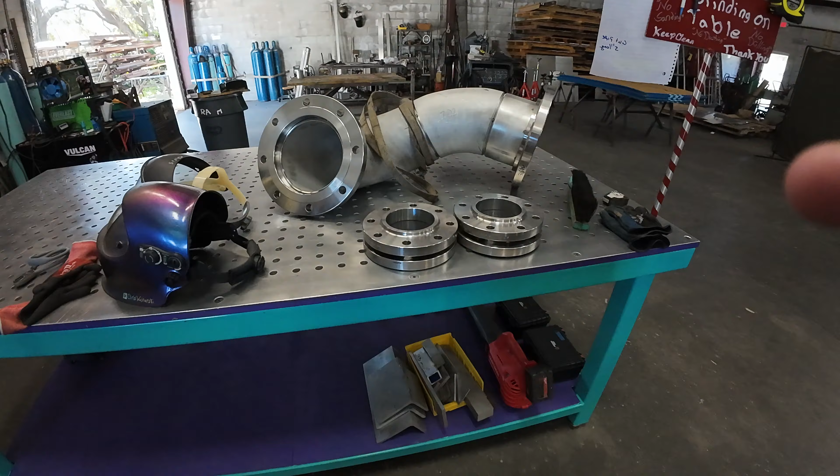Today's stainless steel pipe work, we've got to turn this stuff into pieces into something like that.

Different ways to weld and fabricate pipe to flange spool, Season 3, Episode 9.

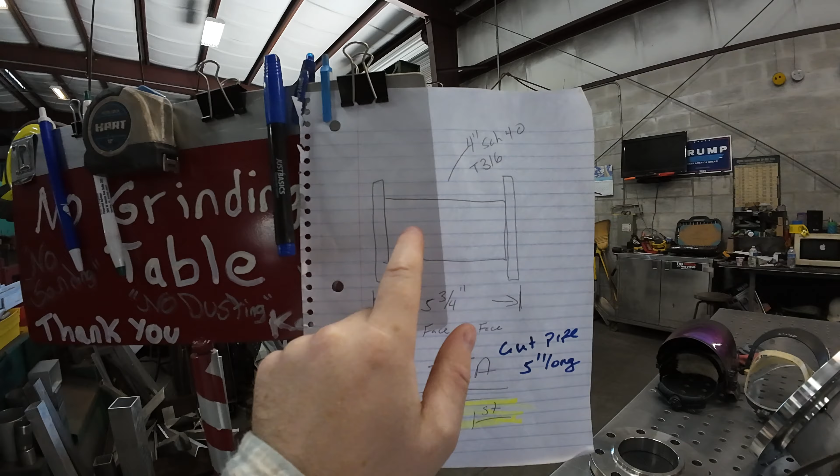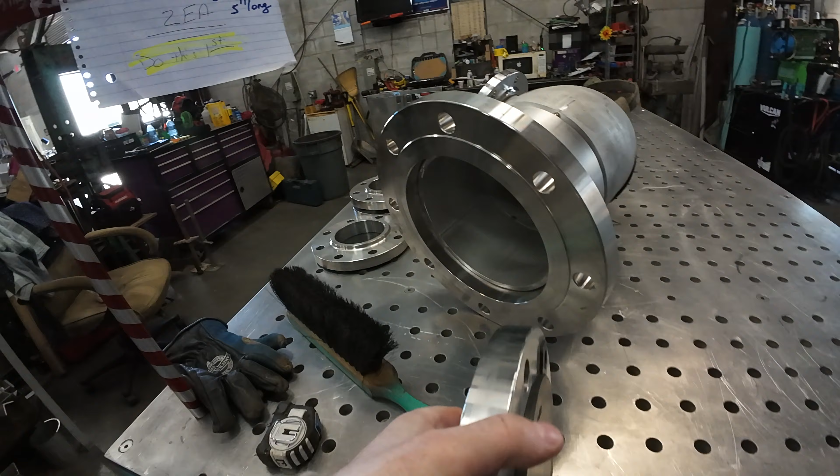Stainless steel spool, 4-inch Schedule 40 Type 316 stainless steel, raised face flanges. Got to make 2 of them that are 5 3/4 inches from outside to outside of the flange, the raised face part. So let's see how I bring you along for the journey.

February 21st, 2020. Wojnarski is back again with a welding fabrication tech tip video for everybody, and the weather forecast is 56 degrees right now, pretty sunny, tiny bit cloudy, not really, but 56 degrees, high of 63 and low of 36 in sunny Florida, Dunedin, Florida.

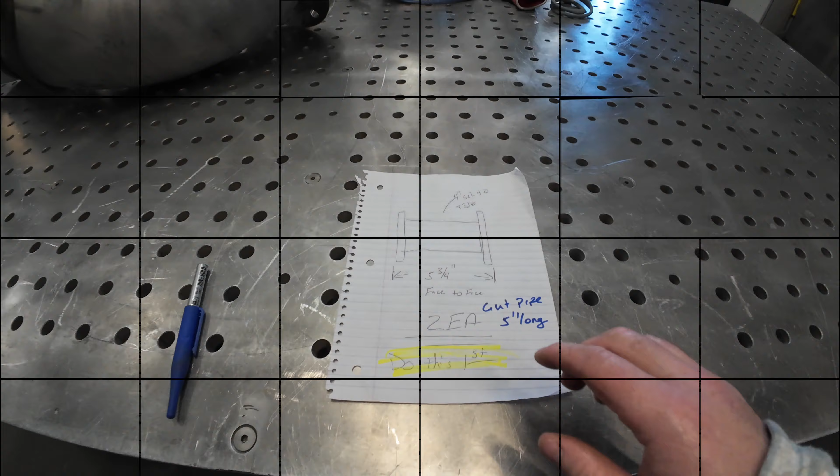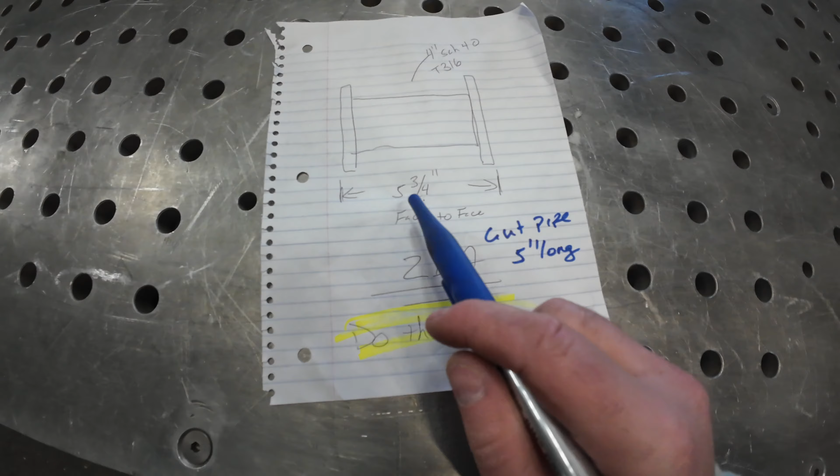So I'll explain it a little bit to you. 5 3/4, that's what I need outside to outside, and I'd like to do a 3/8 recess on the inside for the pipe and the flange. I'll show you in a second, and same thing on this side. So 3/8 plus 3/8 is 3/4. 5 3/4 minus 3/4 equals 5 inches. So I'll cut my pipe to 5 inches, and that's what I already did over there. Just got to make 2 exactly the same size, just because it's 5 3/4 face to face.

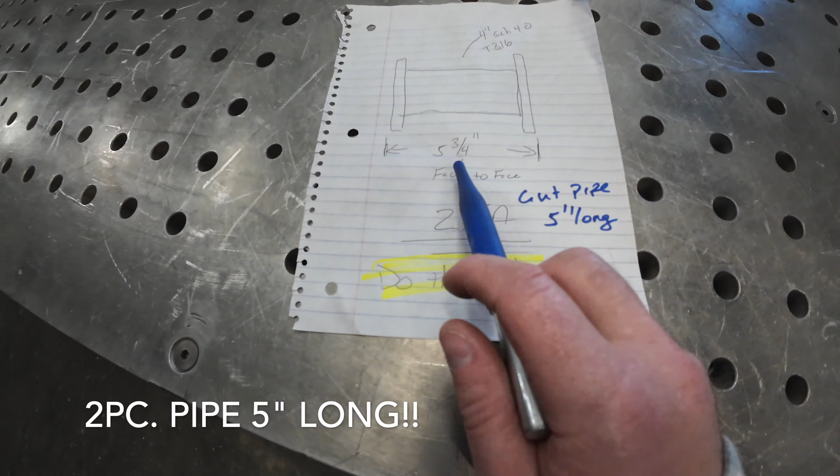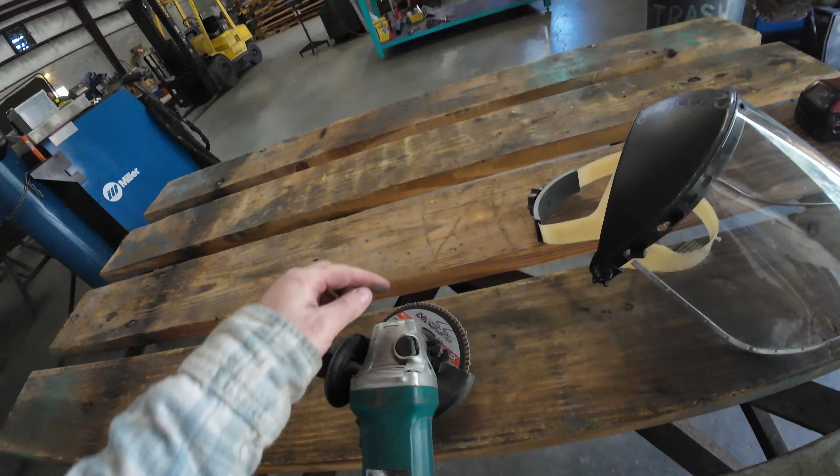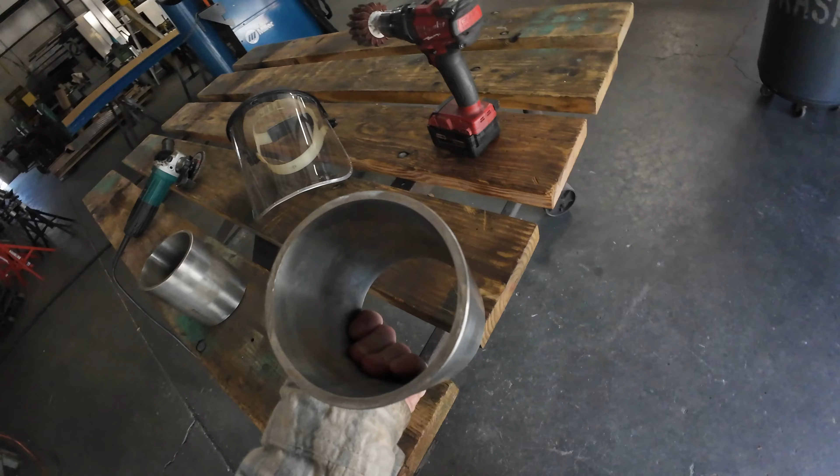So I already cut it to 5 inches, and I deburred it with the flap disc, just a regular flap disc designated for stainless steel only. That's good to mark your things. You don't want to cross contaminate and do carbon steel with that, because it could rust out your stainless. So it's good to keep your stainless stuff with stainless and designate it to that.

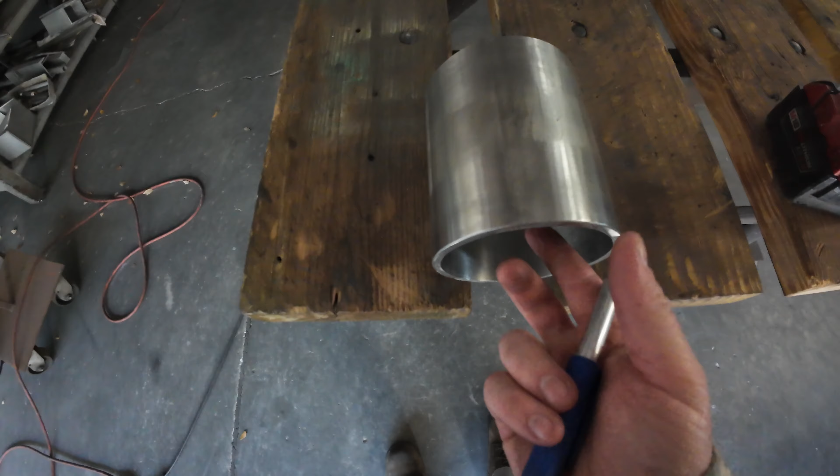After I deburred the outside, I like to take a little bit of the grinding saw marks off to weld a little better when there's not deep grooves in there. I did that with the flap disc, but I like to take a little wheel like this, put it in the drill, and just surface the outside a little bit. It makes it weld a little better and looks a little better, I think, after it's wire brushed.

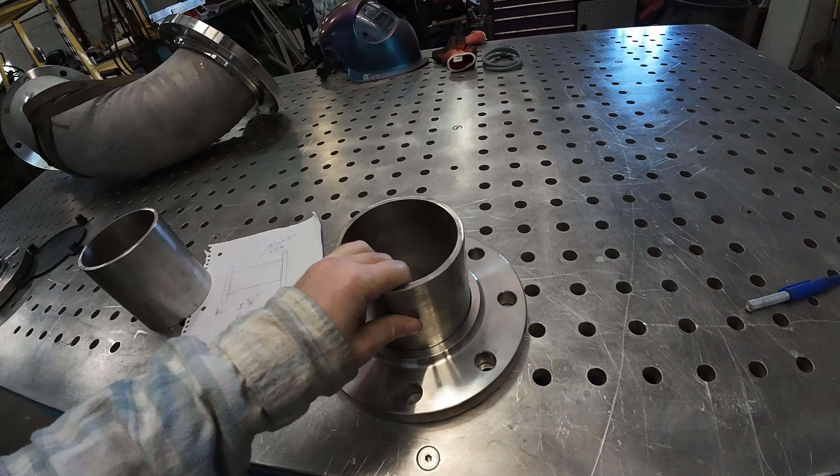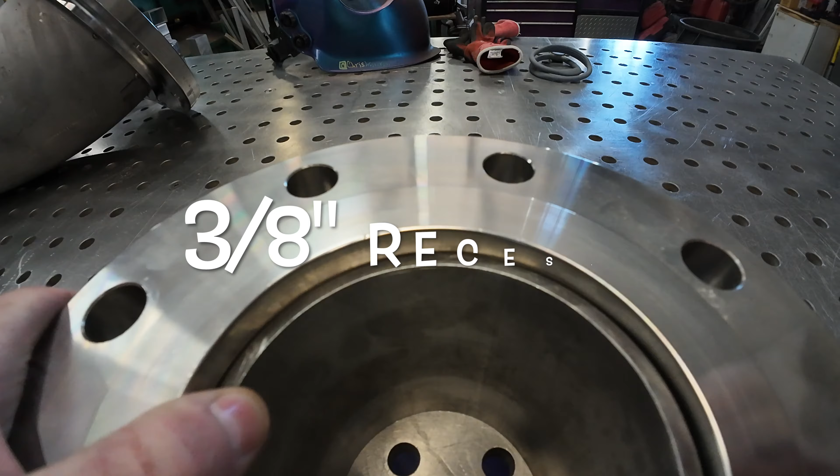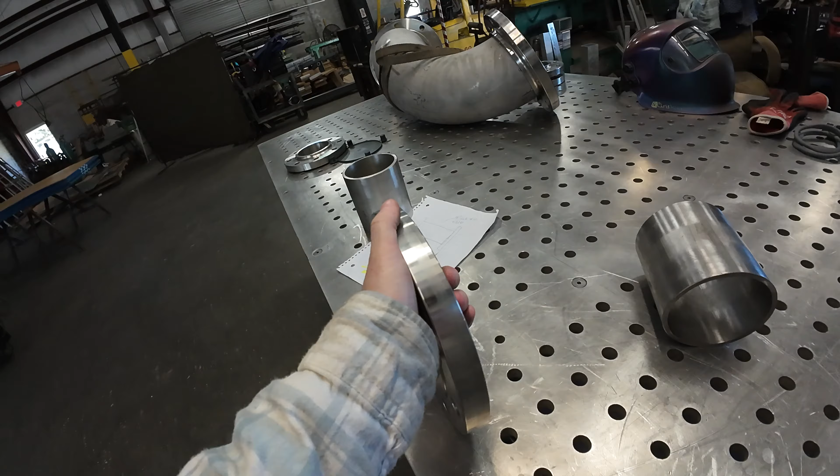After that, oakite. If you haven't seen another video or know about the spools, pretty much it goes like that, and then the other flange goes on top like that, but they got to be clocked right. The holes got to be 2-holed exactly in line with each other, and then this got to be spaced out - that's where my 3/8 comes from. It's got to be spaced out a certain length to get that perfect dimension, so it'll be sitting 3/8 like that - you'll have 3/8 to weld on the inside and some on the outside, or vice versa. Then clock them right 2-hole, make sure they're plumb and level, level that way, flip it 90 and level again.

So we'll bring you along for the journey. All this stuff's cut, and these are good, ready to start welding, but I'm gonna just clean them a little bit with some oakite, get some of that nasty dirt off, and we'll have some nice fresh stainless to start welding. This is my stainless steel cleaner, oakite 33.

Put it in a bucket of water - I mix like 1 part of that to 10 parts of water, and I use a Scotch-Brite pad, put some gloves on and clean your stuff up and wash it off, let it dry, nice and pretty, and it's passivated after that, so it protects it a little bit more. It's good to do your parts after welding and everything for like a final thing, and it protects it and makes it look really good.

I'll do it beforehand too, just because it's a little dirty right now and I like to clean it up. Little caps I like to save too, and once it's all done, I'll put them back on, just to protect them for customers, so the faces don't get all bashed up.

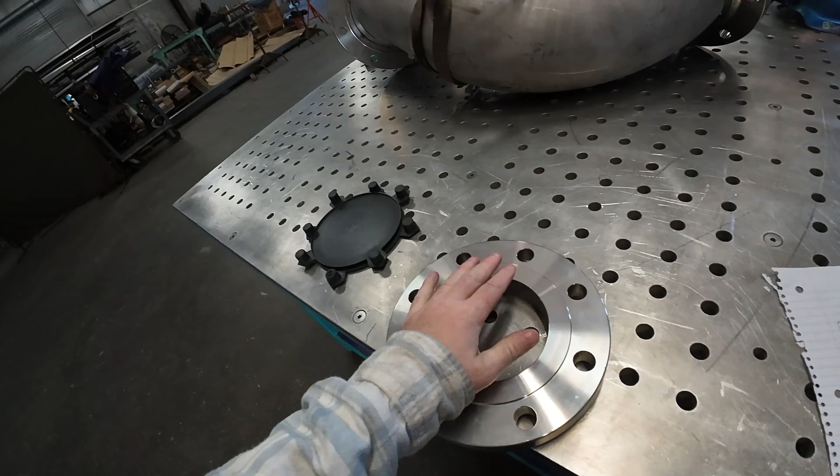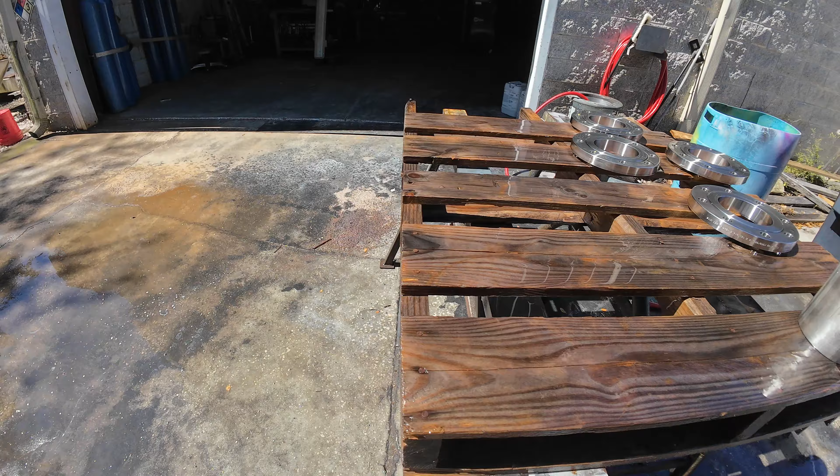All right, all cleaned up, ready to basically start fitting up and welding it. So let that dry, and it's about 12:30, 1 o'clock, so I'm just gonna eat a quick lunch while that dries, and we'll get back to it.

Hopefully you guys can see a little better in here too now. I got my new little light bar I installed and put a couple lights up.

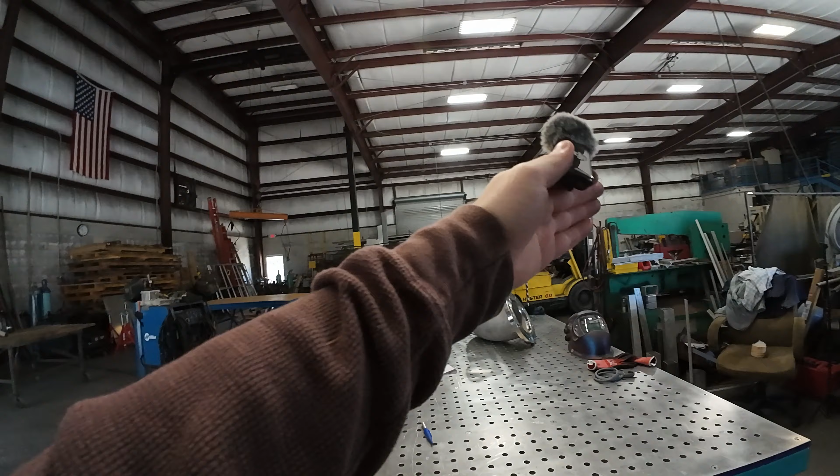Made this little light bar, ran an extension cord, and it swivels, so it could go right over here or over that way too if I want. So give me a little extra light. Hopefully this video will be a little lighter.

All right, we're back finally. It's like 2:15, an hour, 2 hours later. Just had too many, like 3 or 4 people come in, and I had to help take care of them.

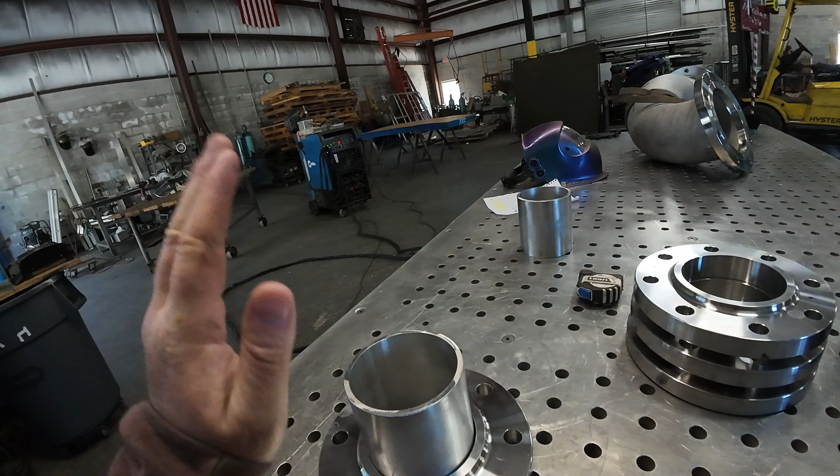Back to it, gonna start fitting these up onto this. I don't know why I drew my lines on, I don't need them for this, and I don't do it this way. So I'm just gonna clamp this down. I'll show you how to do one, and maybe I'll time lapse the other. Clamp this flange down, make sure no dust or anything underneath. Clamp it down, put some 3/8 shims in there. Put this on, kind of center it up if there's a little play in there, and we'll tack it. I only do that for one side, then I'll stand it up and 2-hole the other side. So I'll probably do that, do another, and then we'll do the other.

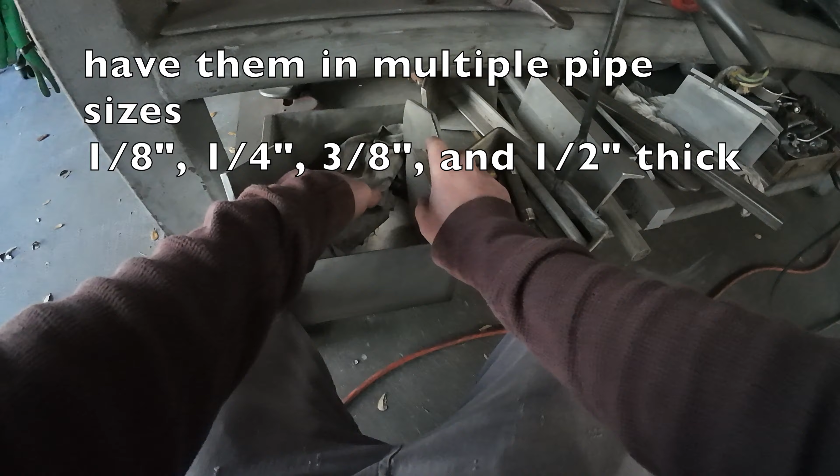Now I should have a shim for that, or I could use fireball shims. Here's our little pipe shims that we have already pre-made. Let's see if I got some. 4-inch, 1/2 inch, there should be a 3/8 somewhere. There we go, found it. See how dusty it is over here?

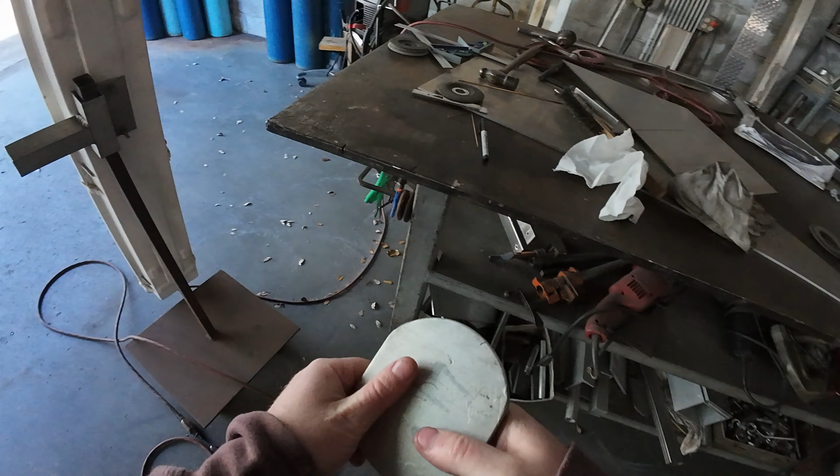Hint, hint. But here's the little pieces we have made up, over time they come in handy. So you could use this, or you can use fireball shims or something that's 3/8. You could do whatever size you want, 1/2 inch or something, but 3/8 is good for us. Sometimes half's a little better, but for what I cut my piece to, I need 3/8 to get that now because I cut this already. So that's that.

Put that in like that and just kind of center it up and make sure I hold it down. I could get something to hold it down or something when I tack it so it doesn't pull up, and we'll get ready to tack it.

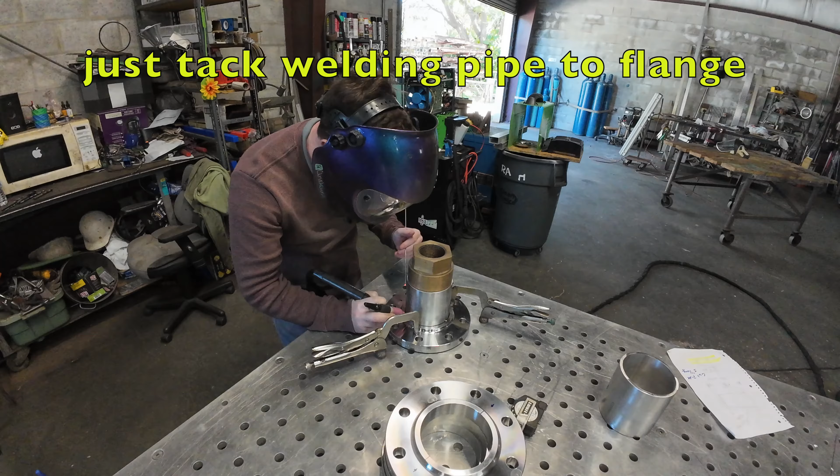Okay, so we got our pieces tacked up like that now, I did both of them. Now we can move on to the next step.

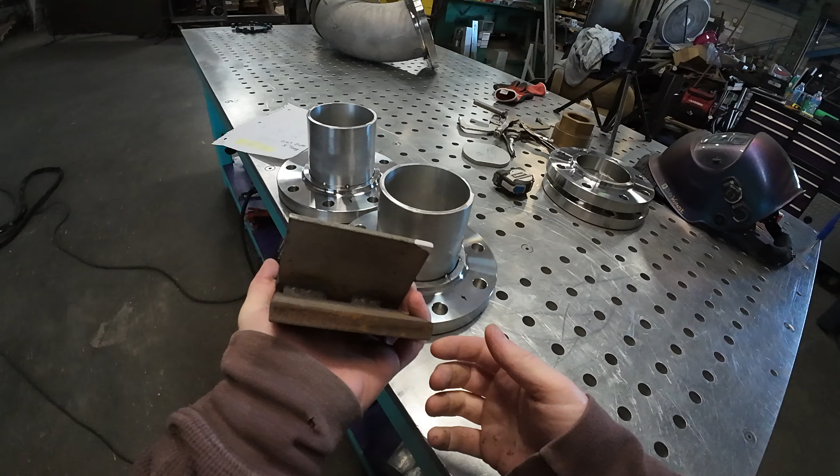And then like that, I'll have that little inside to weld there, and up here after it's all done on each side. This thing's short. How short this thing is going to screw me up a little bit because I usually use these things, but now the other flange won't fit on, so now I'm going to have to find something small. Anyway, this is what I like to do though.

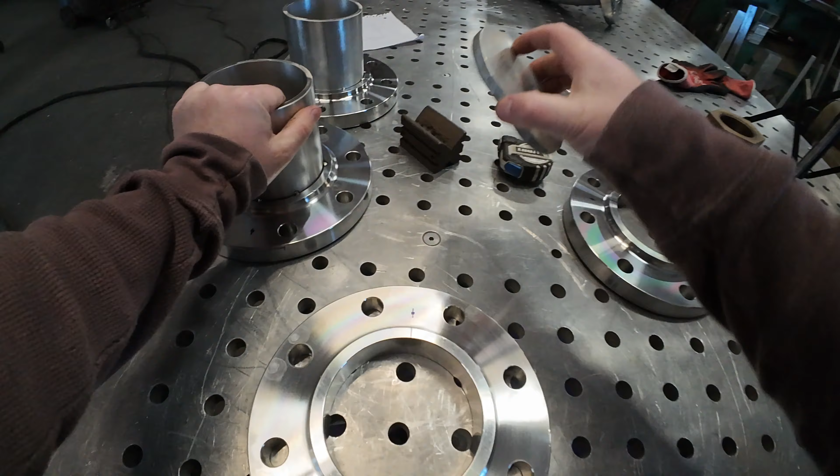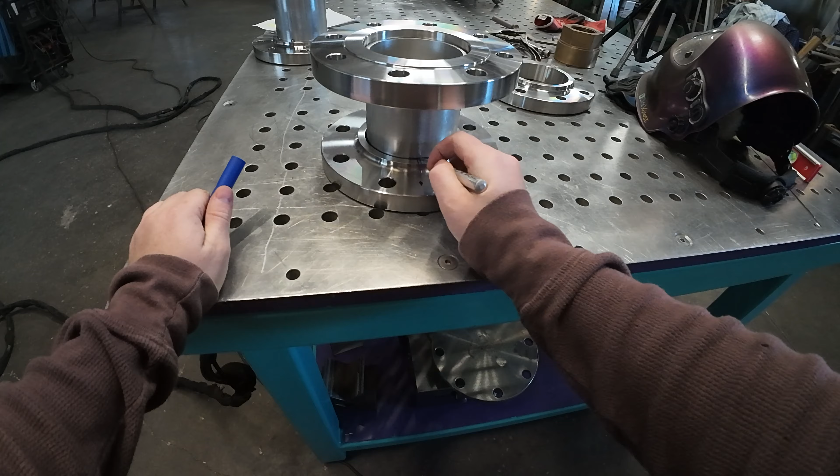Get my second part, put the shim back in there, and put this on. You can kind of eyeball it to 2-hole if you want. Just make sure it's kind of flat, and I like to just trace a little line around there because that's my measurement I need. Maybe I'll just do it in quarters. I mean, you can go all the way around if you want, but it's not needed.

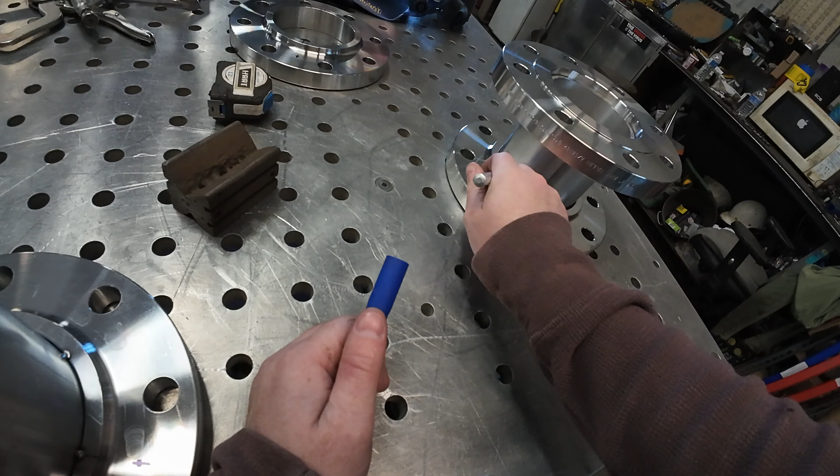And then do the same thing for the other. That way, when I stand it up like this, I know how much that flange needs to go on to get it to where it's got to go. And that should be my 5-inch from face to face, or pretty close. Then I'll measure after that.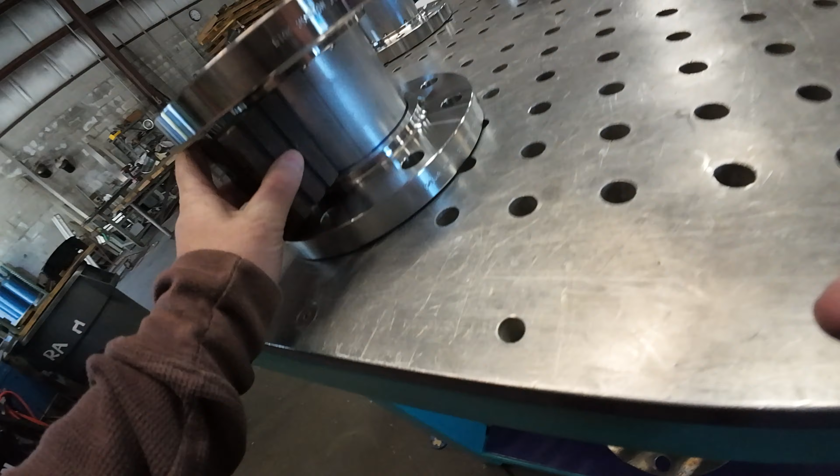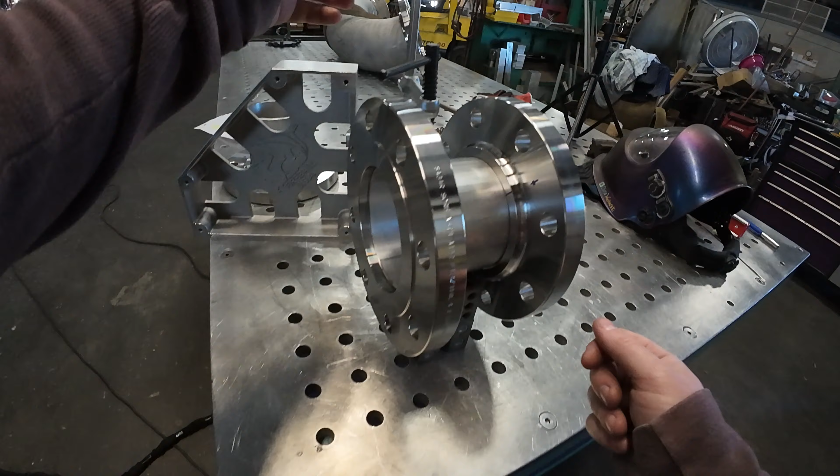Yeah, so this little block won't fit in either. So now I got to find something a little smaller than that, preferably a V block. I feel like this thing just got like 2 times as hard because my normal way that I do it, I can't do it. I can't fit this clamp in here, and my V block won't fit in here, so now it just rolls freely.

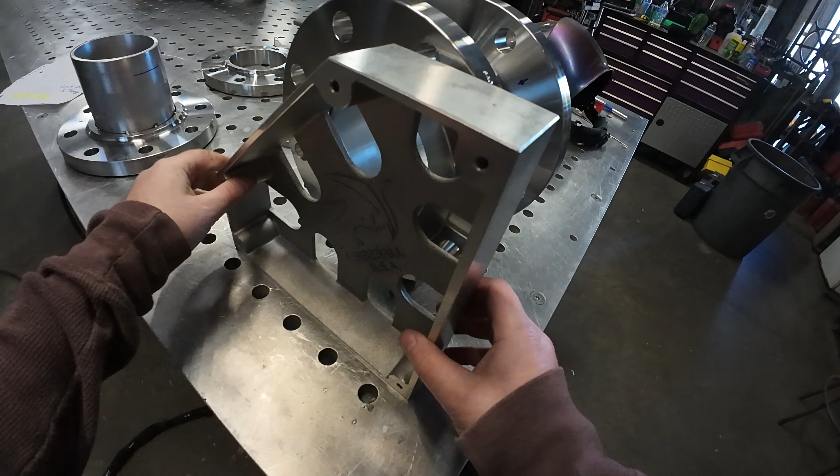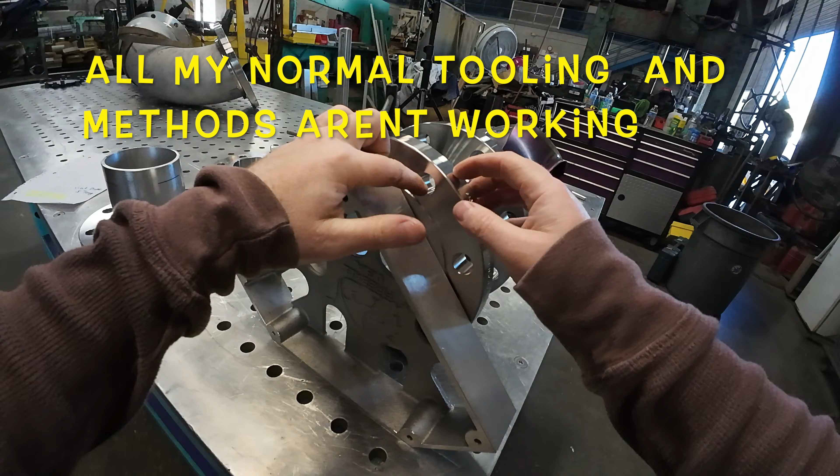So I'm going to do it a different way this time. Tacked on the outside, so this is my piece I'm going to hold it down with. So I'm going to clamp this down, but I still got to have room to get my 2-hole pins in. So got to figure something out that I can clamp it maybe like that, and put my 2-hole pins in, clamp this down, and clamp this to this, and then I can kind of clamp this square like this and keep it from moving and hold my 2-hole level like that. So if that makes sense, here's your 2-hole pins.

You need these for keeping your pipe level if you don't know already.

Just helps you clock one side with the other, because that way it'll be perfectly in line and everything matches up in the field. So that's what most stuff goes off of.

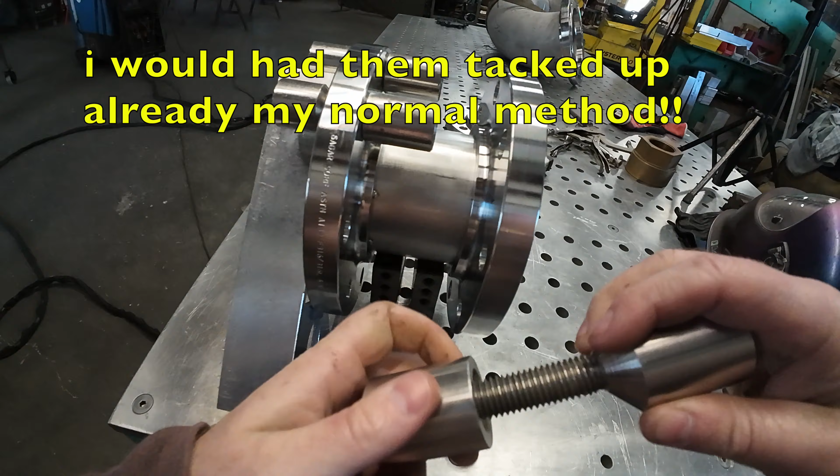So small that my 2-hole pins won't even go in like that either. I'm sure I could probably go like this though, and that'll still be 2-hole and come down here. But man, this thing's turning out to be difficult.

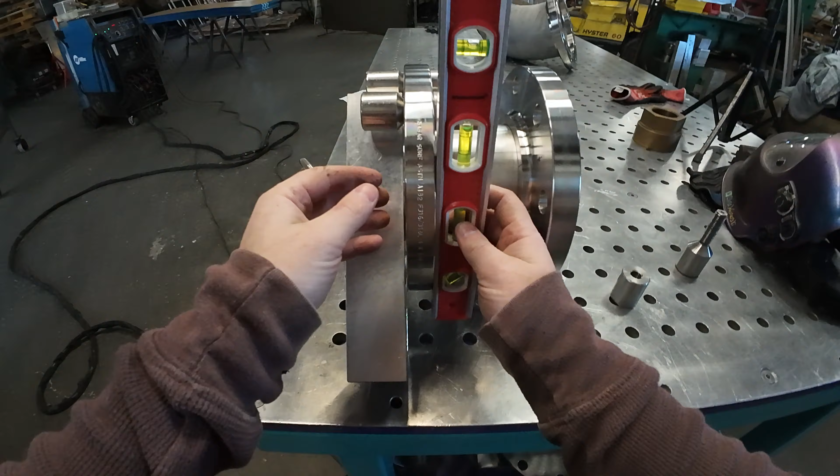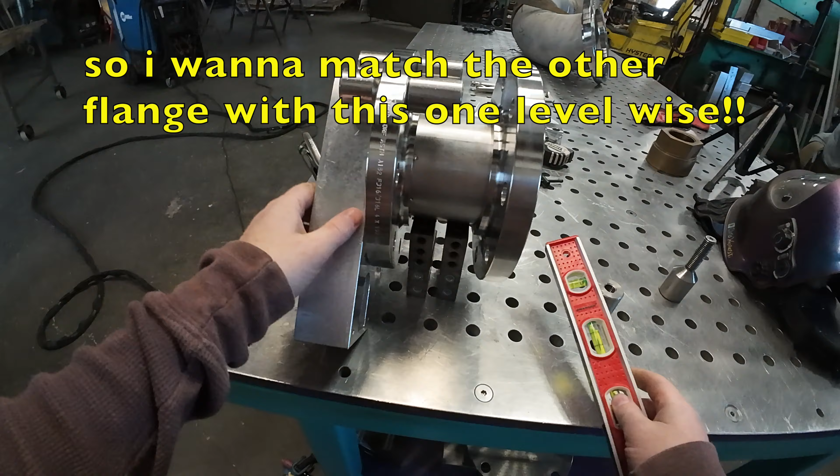Let's see, hopefully it gets us in the ballpark. Kind of level that, clamp that down. That's pretty good. So that's 2-hole like that. I can't even level off the face of this thing. It's so... okay, level right there, match it with the table, which is good. We're a hair towards that side, hair towards that side. So I think that's pretty good.

Now put my 2-hole pins in this side.

Alright, I'm not really sure where I left off before. I had someone else come in, but that's alright. I need a little break. This thing's kind of frustrating me for today.

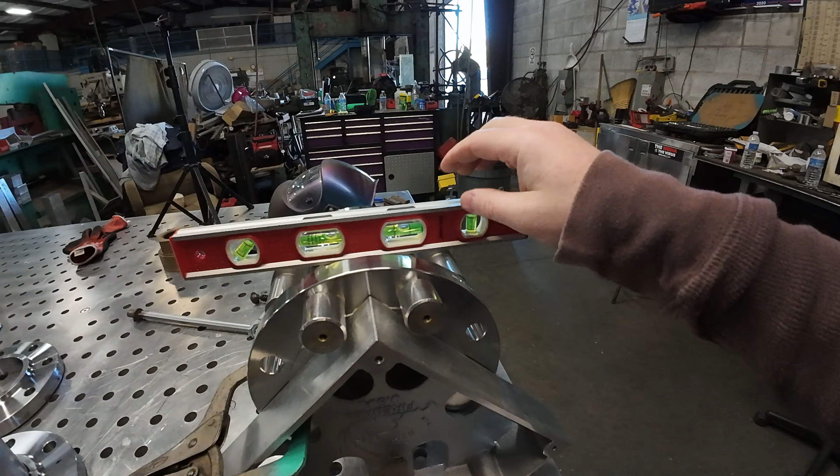But anyway, I got this thing 2-hole up top, I think. Oh, that's weird, moved a little bit. I gotta tighten that pin now. So that should be hopefully close.

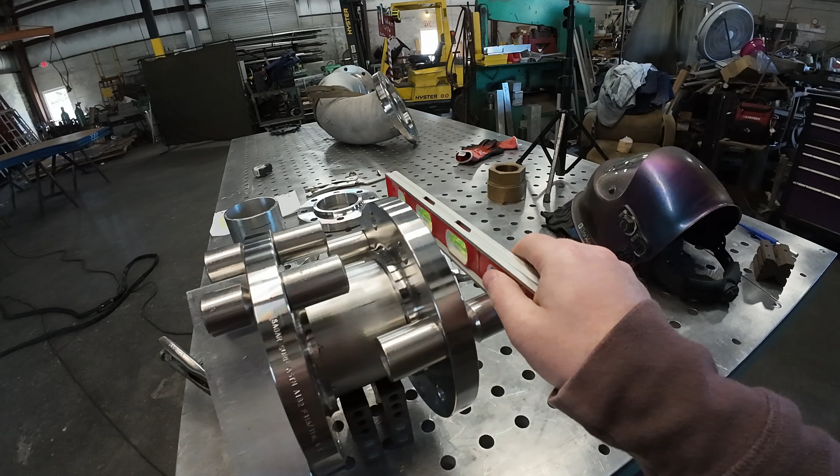And this I gotta just get set up. This should be level like that, 2-hole like that, and now clamp down. So that should be good. Now I just have to put this piece on and try clamping it or doing something.

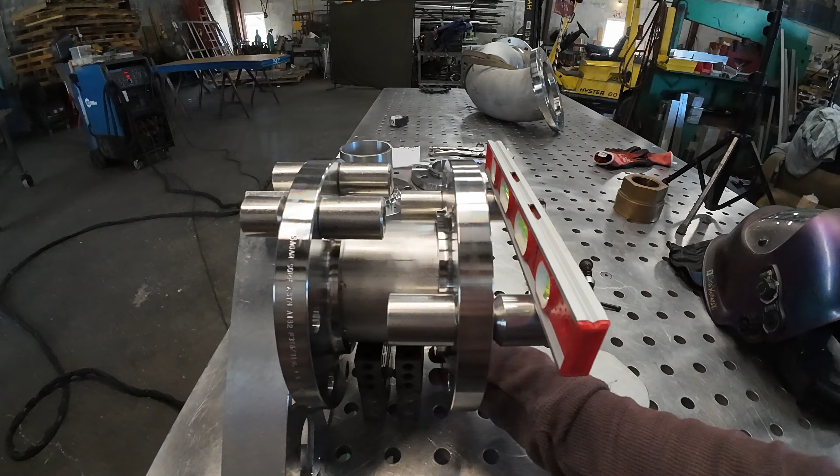I could probably get it close like that. If I 2-hole it somewhere like that and get it right on my line, you could kind of see that, should be close enough. And just get a tack up top and then level it like this and push the inside in wherever I need it, tack the inside or the bottom, then I'll spin it 90 degrees and do the same thing, and should be on a roll with that hopefully, finally.

I mean, really it's not a big deal. It's just funny because I was talking about this with somebody named Travis, one of my follower friends or whatever, that he does a lot of smaller stuff and it's a pain sometimes. And it's funny because we were talking about that yesterday and I run into that, and that's what this is. I mean, it's not a pain, it's just my normal tooling setup is a lot easier, or I have tooling set up for bigger stuff, where the smaller stuff I just have to refigure stuff out. Where if I did this all the time, I'd have something easier. But enough jabbering or jibber jabbering, whatever you want to call it, and we'll get back to it.

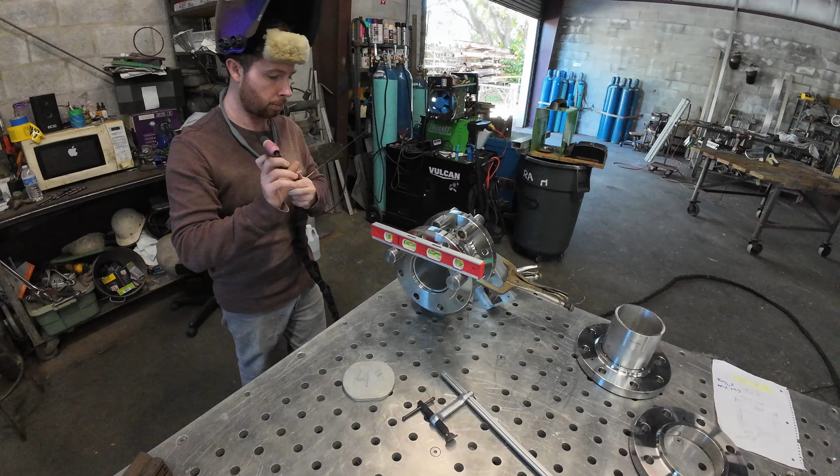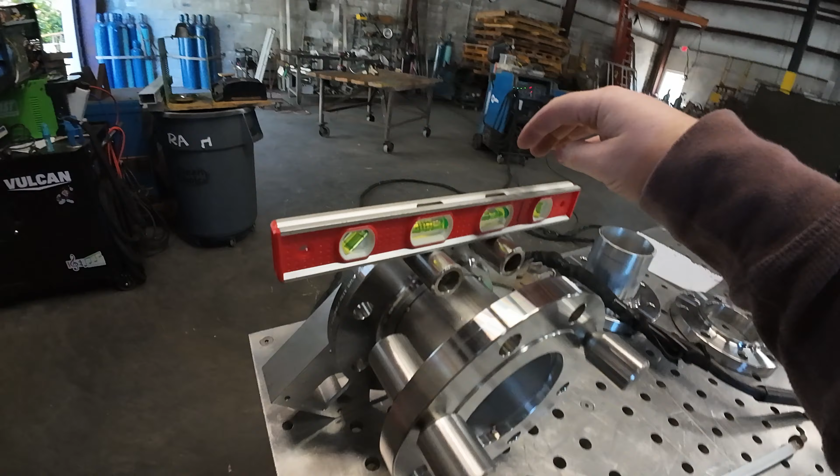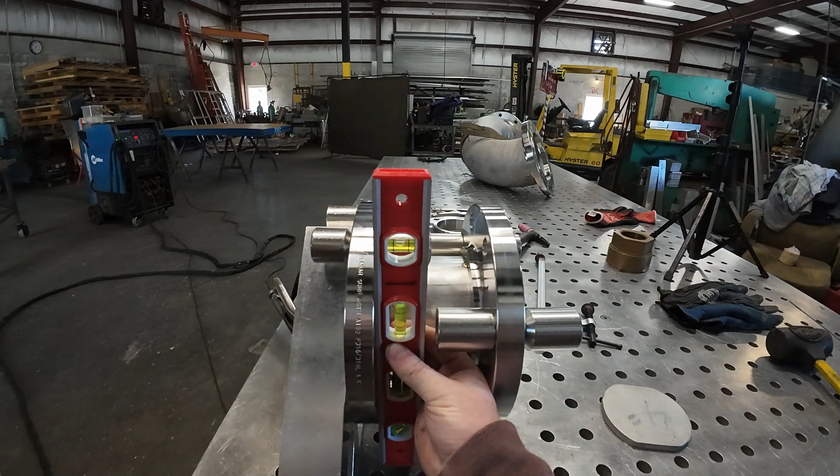Alright, hopefully you've seen that pretty good, but we got it leveled up top. We're level right there, so we're pretty good with that. Double check this. I'm a touch closer to the left line, so I made this one closer to the left line too, so we're good with that.

Now I'll just spin this, unclamp that, and spin it 90 degrees, which now my 2-hole pins are going to be in the way. Usually I could leave them on, but I could probably take them off now. You gotta move everything around, but had to readjust this thing, that. Take those 2-hole pins off. I could leave these on, but this doesn't have to be 2-holed with that.

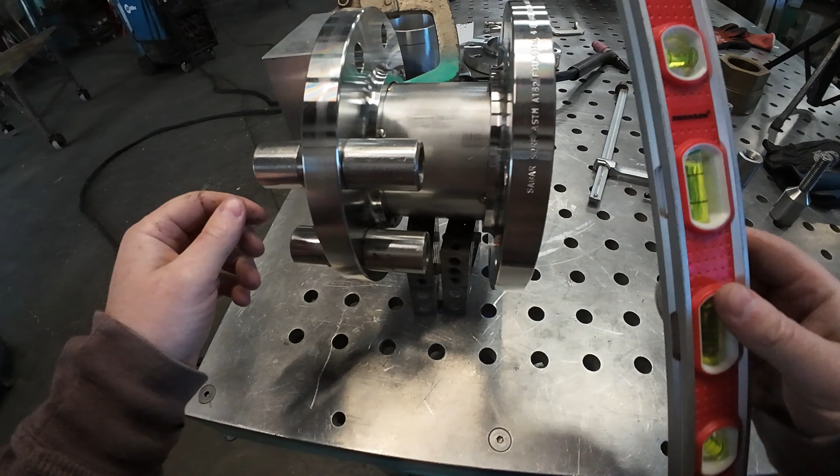It's still in line and it's tacked, so it shouldn't move. But main concern, which now I kind of have to, well, I could get in like this, but this is already tacked, so we already know that this is level with this. So we're level, close to the left line, like that's how the table is or whatever. So I just want to bring this one, level this way.

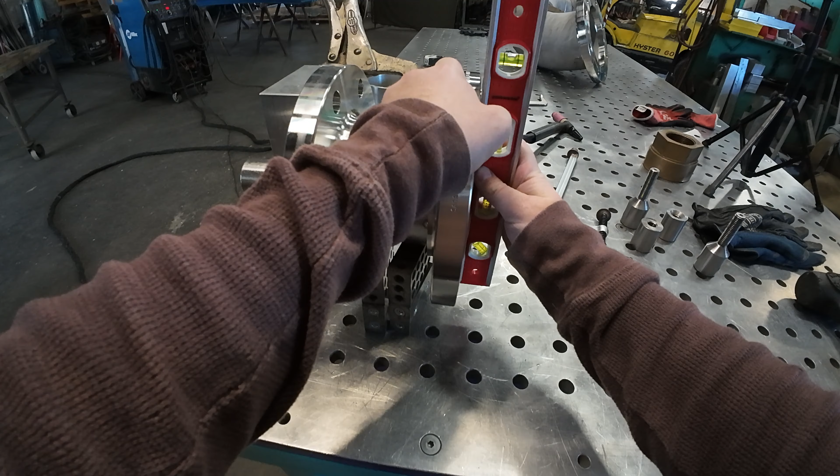And it should be good. And then afterwards, I'll just set it back up straight and 2-hole everything and just make sure it's level again that way and 2-holed. So that's what we'll do. I think we're close like that, close to the left line, close to the left line. So I think we're pretty good.

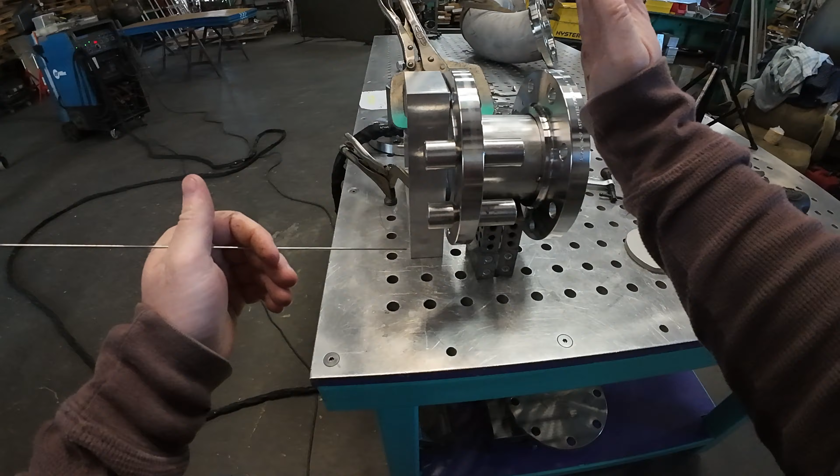Put a tack on the top. It does pull a little bit sometimes, so you just got to account for that. But you can usually bop it or something. Not sure if you'll see this with my helmet on.

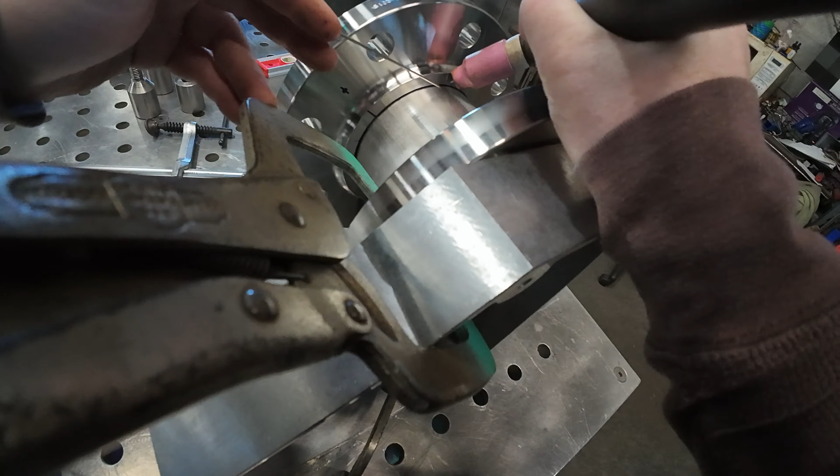Just a quick little tack, nothing fancy. And you should be wearing gloves when you do that. See, it pulled a little bit, but I think we're alright. We're about in the middle now. Yeah, I think we're pretty good.

And if I would tack the inside there, it would pull back a little bit, but sometimes if I tack on the inside, being that I can't get under there, I'll tack there. It doesn't really pull that much there. So you can use that to your favor sometimes. But I think we're close enough for that. Put a little tack on.

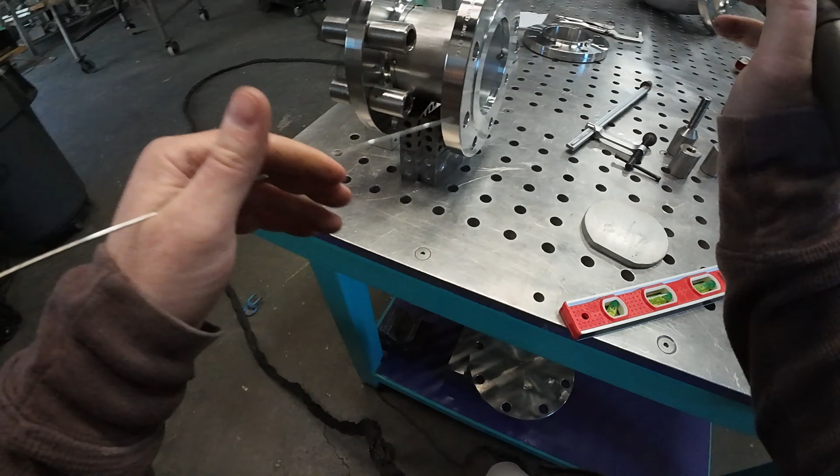There we go. So let's see, okay, how are we? We're pretty level there.

Pretty level there. And we can't really check our 2-hole, so we'll spin it and check our 2-hole. So I get my smaller fireball square and try to 2-hole this, and being that it's got a raised face on there, you gotta watch where you clamp it at. Otherwise it's not really level.

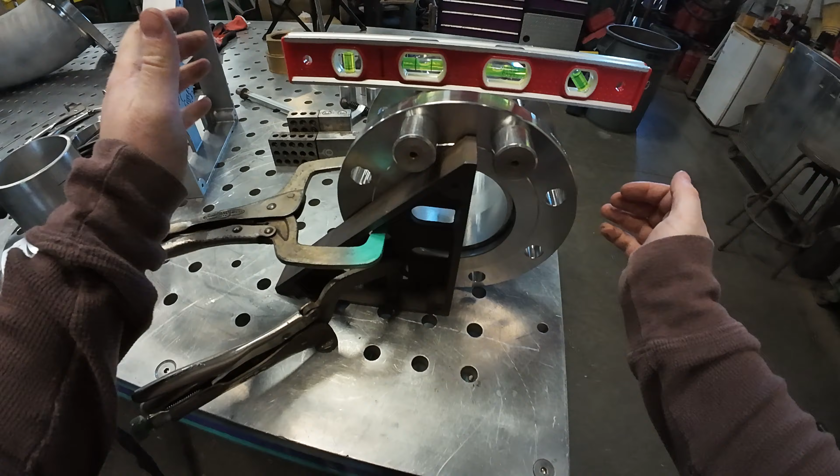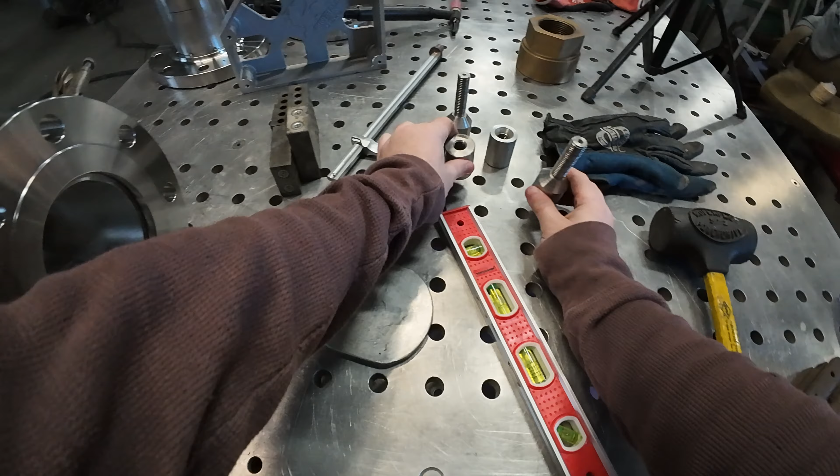Okay, level. So now we'll put our other 2-hole pins and check that, but just check our level here. Pretty level, I think we're pretty good. So we were level that way, now we're level this way. Now if my 2-hole pins are in line, we should be good.

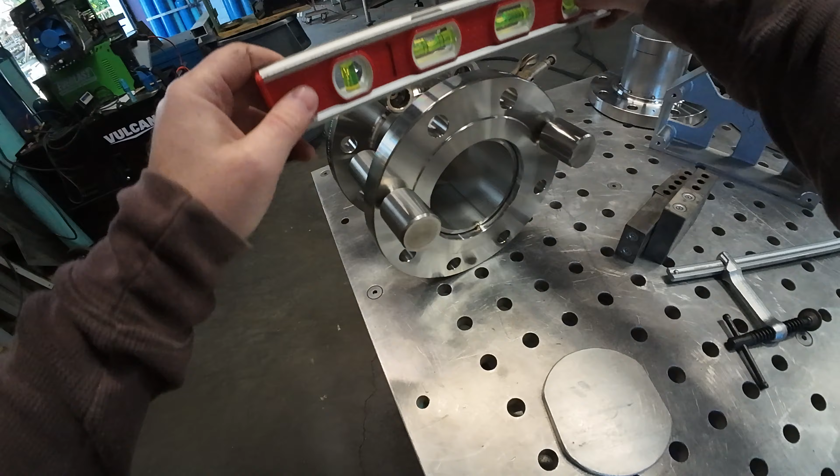And let's see. I think we're pretty good. And that's how you do it. This was probably the hard way to do it, but I think we're good.

So now I'll just throw, I like to put 8 tacks on the outside and 8 tacks on the inside of each piece, just so it doesn't pull or anything, but at least 4 tacks and 4 tacks I think you should do, just so it doesn't pull or anything, and it should be good to go.

One thing I forgot to do though, which was kind of dumb of me, but I guess I got too distracted, is measure my part before I tacked it, because if I was off now I'd have to cut the whole thing. So I think we're pretty good.

I checked it and we're a 64th under about, which I wanted to make it just a little under. I'd rather it be a little short than a little long usually. So if they usually give me whatever measurement, I like to make it just a tad bit under, not a lot, like maybe a 64th to a 32nd.

So we're good and we're level, 2-hole, and that's it. So more tacks and ready to weld. I'll time lapse that other one Monday, and then we'll time lapse welding the thing, I guess, or get you a little part of welding it.

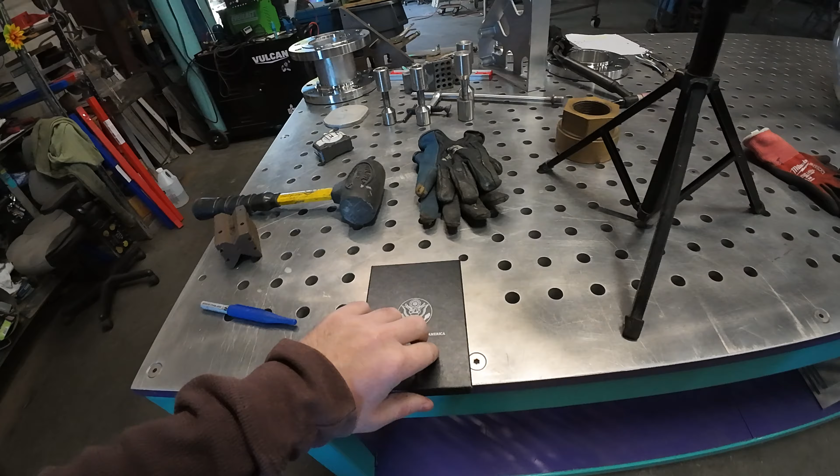Without looking it up, take a guess in the comments and let me know. This was $1, you could buy this back in the day. These used to be $1. Well, not the whole case and everything, but that coin itself was $1, and they used to use that as coins. And then later on, I think when they sold this, it was like $20 to $50 or something. Now guess what that coin goes for. I'll let you know if you guess, reply to you in the answers. I mean, you can look it up, but it's a little game for you.

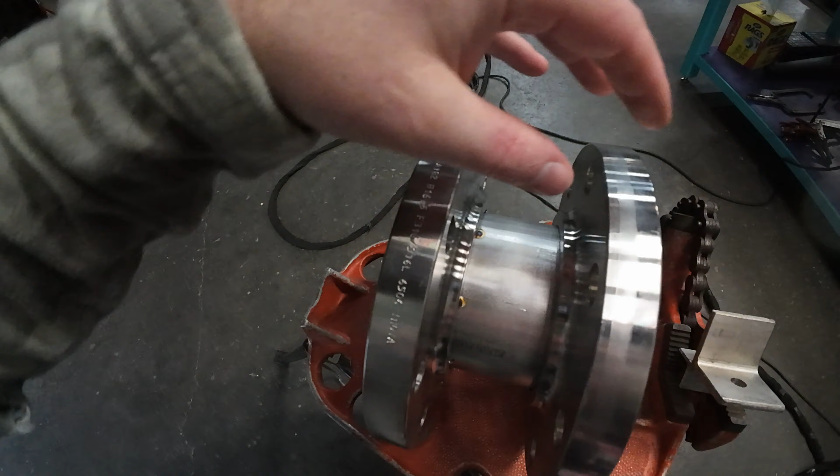This one's already welded up or tacked, and this one's loose, but I'm putting them both on to balance the weight out so it doesn't lean back like that, and that centers it up pretty good. I've got enough room right in there for this, and I could bring this out to my line where I need to.

Hopefully this chain's long enough. It's a little rusty, so I'll have to clean that part when it's done, but enough jabbering for you guys. I think that works. So I'll put my two-hole pins in both sides, lock it down, try leveling this thing out, and then we'll work on that side.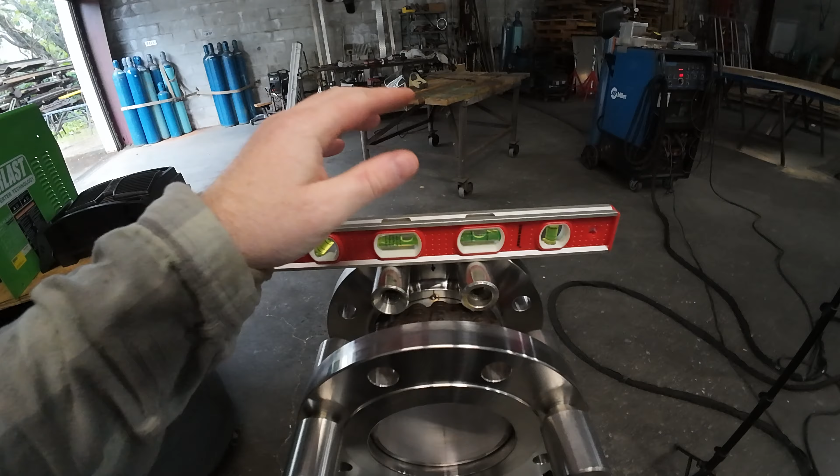I think I got it pretty good. That worked pretty good, that idea. I don't know if it's faster or not, probably about the same speed, or maybe faster, who knows. Definitely a good idea though, definitely.

Thanks, Travis, that was a good idea. Two-hole level there, level here, and this is clamped down really tight, so that's actually pretty good. I think what he was saying too is you could take a jack and jack it up right here to take the slack out of your flange to level it out, because there's usually a little slop in there.

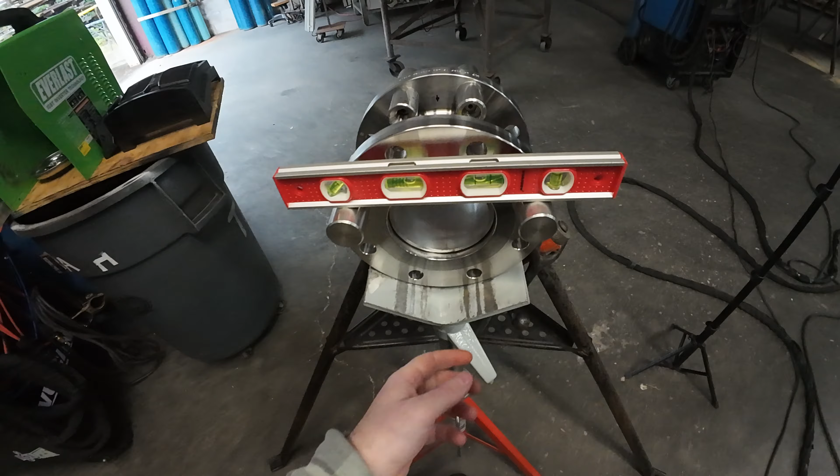So I did that a little bit, and I just had to adjust this, then put it on my marks, or a little over about like that. Put a tack on the top, make sure it's two-holed, level it like this, put a tack on the bottom, then spin it 90 and do the same thing.

I've said it in a couple videos, but I'm doing type 316 welding right here. This is all 316 stainless steel, so make sure you're using the correct filler wire for type 316. You don't want to use 308 or something different, so use your appropriate wire and double check. Good idea.

Alright, so that worked out pretty good. I spun it 90. I had to move my two-hole pin because these things are too close and it's just hitting everything, so I moved it to the top. I don't really have to recheck the two-hole when it's like that, but I do anyway.

So I spun it like that, and then this set I had up top, which should be equal, but it was... anyway, so I put them back how it is.

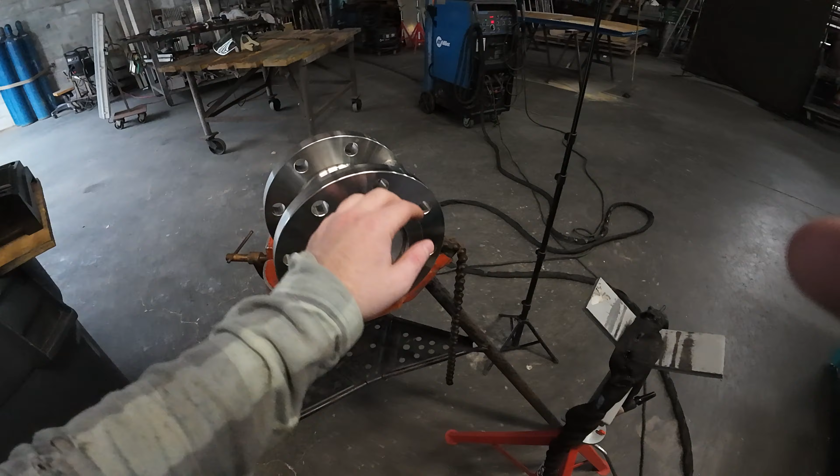We're good. Now the only thing I forgot to do again was check my measurement before I tacked it all, getting ahead of myself for you guys. But we're pretty good, 5 3/4 would be from the edge of this flange because this is a raised face flange. I like to have 8 tacks on the outside, 8 tacks on the inside of each side before I weld it.

This requires no purge or anything, so pretty easy to weld. I could probably weld it on my little positioner. So tack it up, we'll clean this up, get the positioner out and ready to weld.

That was actually a really good idea. I'm going to save that block too. I could have used that block and put it on my normal setup and that would have worked too, but I like that tripod idea, that was pretty good too. I might save that for the future and try it again. So thank you, Travis, that was a really good idea, I appreciate it, shout out to you.

I got them all tacked up, inside and outside of everything. Now's a good time to clean up your stuff. If you want to clean your filler wire, just wipe off your marks so they don't get stained once it heats up, because it bakes on there and it's harder to get off. I like to do that now, plus a final clean over, and we'll get ready to start welding.

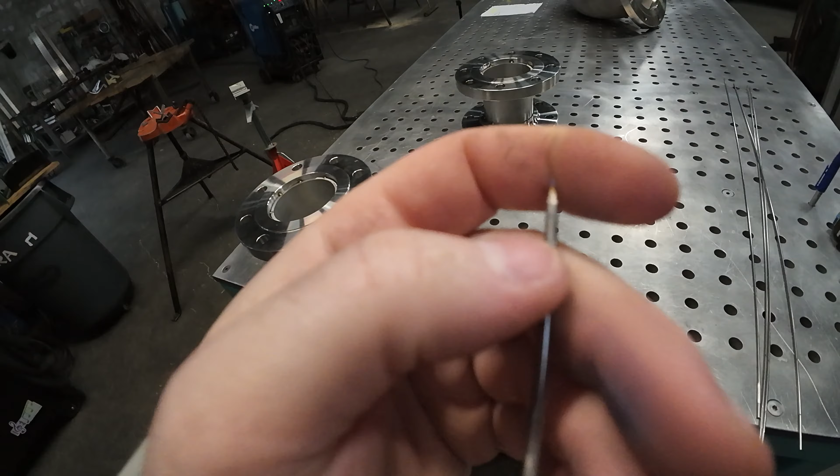And here's why I like to clean my filler wire: brand new filler wire from the box is a little dirty. I'll give my tungsten a quick sharpen before I start welding. Good idea, and look at that, they came out maybe like a 128th of a difference.

Pretty much close to each other, so I'm happy with that. Our Everlast is still down for the count, so we're going to use the Miller.

Got my book, 4-inch schedule 40 pipe to spool, that's a spool, straight spool. So inside, which would be 155 amps and 32 for the speed. So crank that up, 32.

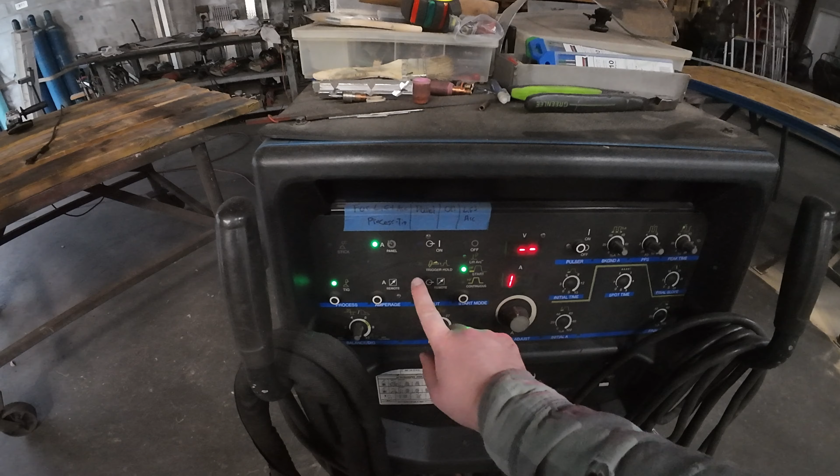I'll probably bump it down to 31 just because it's Monday and I'm probably a little slower today. And 155 amps. I'm not going to use the foot pedal, I'm going to do like scratch start or whatever. So I got to change this, the panel on, lift arc.

155, and then gas is about 25, 30 CFH. I like to weld these first, the insides first, and then I'll weld the outside after. Or, I don't know, I guess would that be the outside or would this be the outside? You let me know. Get a little caffeine in before you start welding.

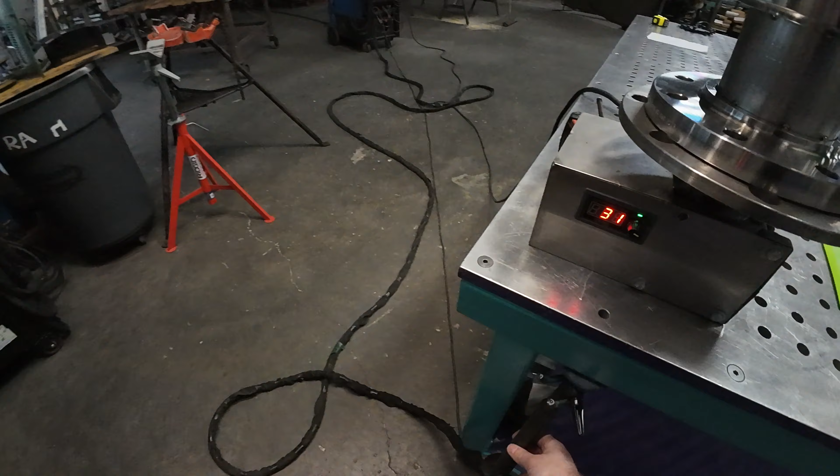I hate this torch, it's too big and bulky. The thing's like an anaconda, this stiff thing. Going to be using 1/8 inch filler wire. Remember, check it, make sure it's 316. I'll probably use 1/8 inch for the outside or inside, outside, whatever you call it.

And I don't know how well you could see that. That went pretty good, a little hot. I probably could have bumped it down like 1 speed. I'd like to bump it down like 2 speeds and go like 5 amps a little cooler than that.

But that came out pretty good. The torch is heavy though, gives me like carpal tunnel in my hands. And while it's warm, not hot, but warm, I like to wire brush my color off. So I bumped this down two speeds and down 50 or 5 to 150 amps, so 5 amps.

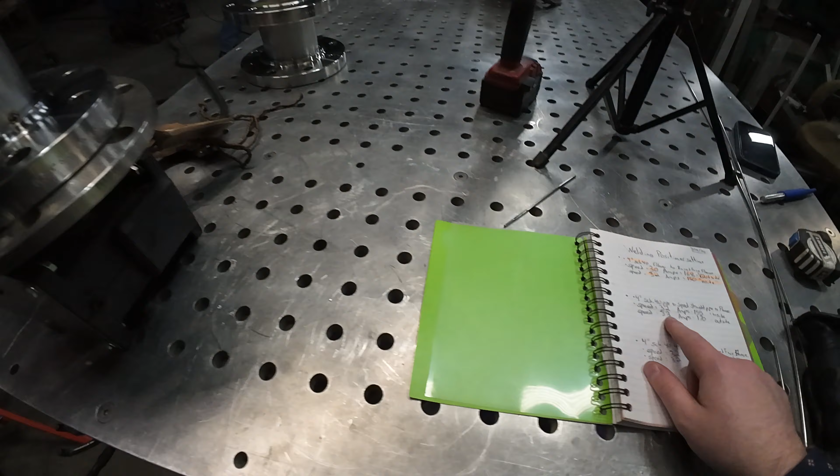170 amps. I know I go hot on the outside like that though. So, I guess that's what it is. Bump that to 170, say 169.

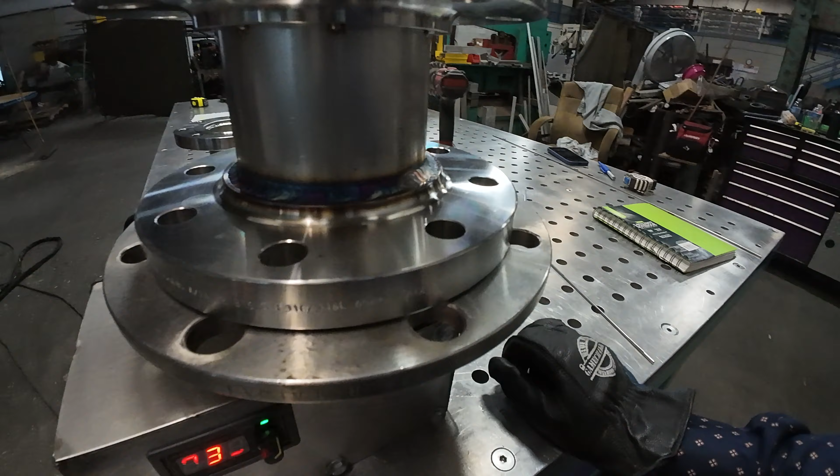Working pretty good. I could kind of cruise along with that actually. A little hot, but I mean it's not hot, just hotter than I like it. But I think that's pretty good.

I could really bump it down to like 165-ish and slow this down a little. It'd take a little longer, but I could bump this up too and cruise along a little faster. So maybe I'll try bumping this up like 2 more speeds and we'll go from there. And the next one I'll lower the speed and just show you guys a little difference.

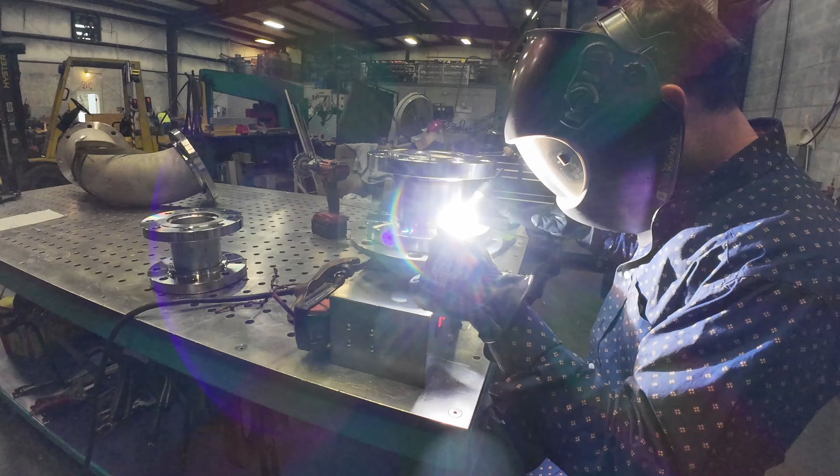Alright, let's see how that did. Still a little bit of color, a little less, but definitely a lot better. You can control your bead a little bit more and have a better looking profile of a weld. Still a little hot, I guess, but actually it was pretty perfect right there. Inside, nice color, you're getting penetration, ending right there.

So it came out pretty good, but you could just see slowing it down, it gets less chance of undercutting, which that didn't undercut, but it's easy to if you're just going fast, where you got to go fast with that. I took like another probably minute to weld this, and I don't know if it's more heat going into this. No, there's more heat going into that, but sometimes the slower you go, the more heat goes into it. Doesn't seem like it, but if I was to bump that down to 140 and try doing this, it might put more heat into it.

All right, and this one came out pretty good too. Let's see, a little dark. I've already brushed that one before, but I think we're pretty good. Me, I'd like to have a little lighter color, but the smaller stuff keeps it a little darker too.

So there's a lot of stuff that goes into account when you're using a positioner, not just that, or walking the cup on the flanges and stuff like that. Like for instance, your tungsten stick out makes a big difference.

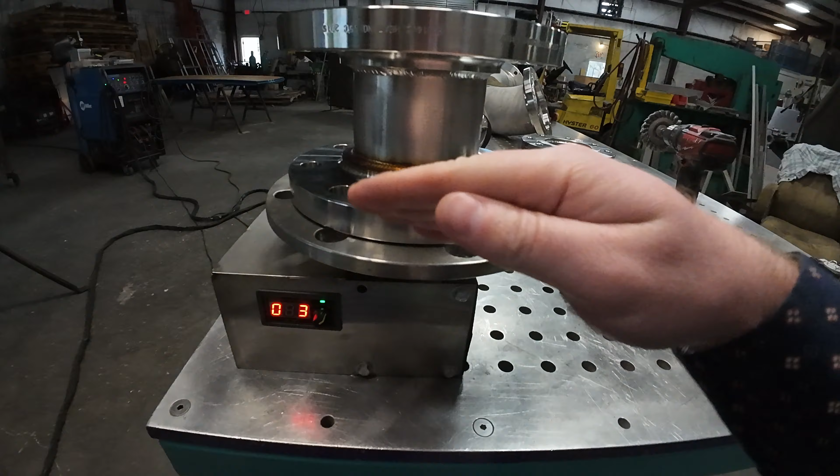Your steps that you do, how far you go with the steps - that was pretty tight on that one. Up here, I spaced them apart a lot farther. It's probably hard to tell, but that's another thing to keep track of.

Doesn't really matter. Sometimes the farther you go, the longer you have to pause to prevent undercut and allow that filler wire to travel in there. Different stuff like that, but a lot of different things you could do to change things up - higher amperage, lower amperage. You could go a little lower and go slower, or faster and higher and go faster. All different game stuff, pretty much same thing with everything else. There's all tricks of the trade and things to do, whatever you want, as long as it's within tolerance and acceptable, and if it's got to pass your x-rays or anything, then that too.

So I'll wire brush this up and straighten this up, and we'll give you a final once over of everything, and I guess an intro or outro of everything.

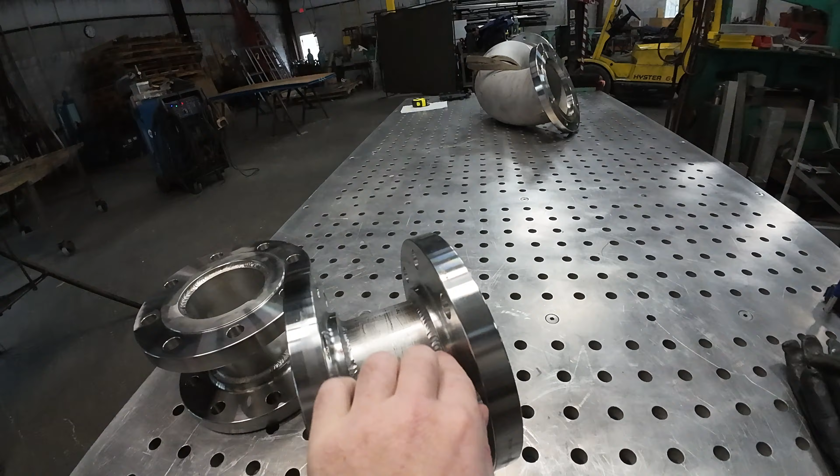I'm gonna oakite these before they pick them up. I'm gonna do that right after I do this video, just to passivate them a little extra, because I got a couple little scratches up here, just in case, and that chain was on there and everything, I just don't want it to rust. So that little passivation will help it and protect it a lot more in the future. So that's that - yeah, that worked pretty good.

That idea Travis had worked pretty good too. I might actually make one out of aluminum. I think if I do an aluminum one maybe too, it won't scratch up here like it's scratched a little bit on that pipe, which doesn't matter - for what these are, it's fine. I think they might get buried in the long run where someone won't see them, but still I like to protect it for the future. So maybe some aluminum ones might help it a little bit farther. But good idea though, Travis - that was really a good idea.

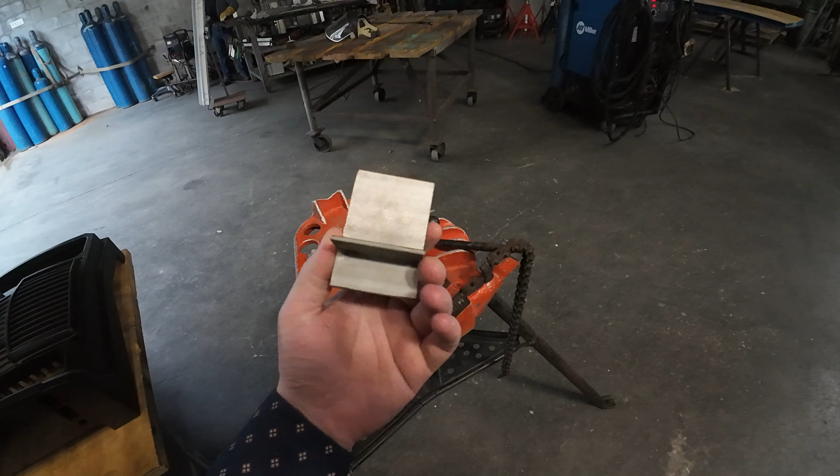That doghouse thing, little doghouse block - I don't think this is the right way the other person made it. It was just easier for me, and it worked pretty good. So if that's it, let me know.

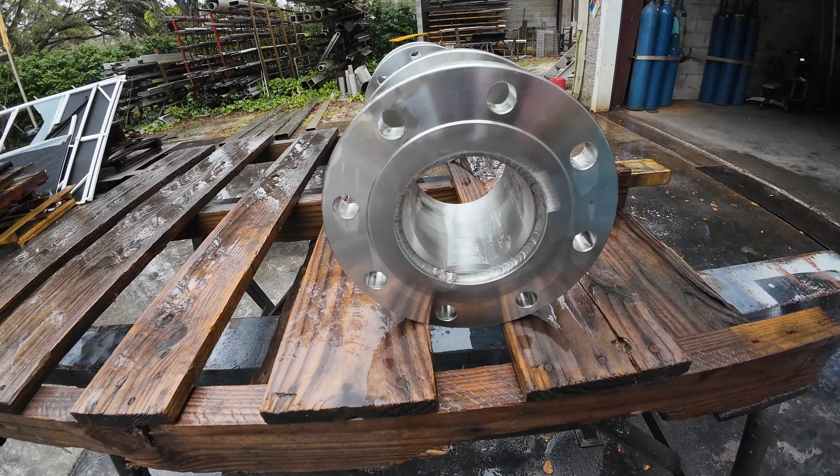One last thing I forgot to tell you guys: always double check your welds, make sure they look good. Even though it looks good when you're welding it, it's still good to take a flashlight if you can. I did before - just go over everything, make sure it looks good, there's no pinholes or any questionable spots. So one extra good thing to do for your stuff. Go the extra mile, take pride in your work. And that's my last little tip for you guys.